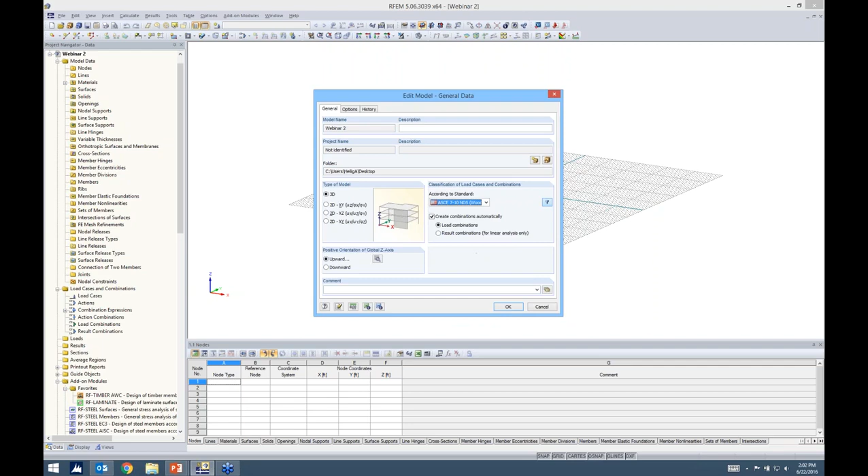When you launch RFEM, this is the dialog box you'll receive. You simply need to give your model a name and define the type of model, 3D, with the orientation of the z-axis upward. For our load combinations, we have ASCE 7 for 2010, the NDS wood load combinations. I check the checkbox to create these automatically, then simply click OK.

Some of you are familiar with RFEM, but for those who aren't, this is essentially the program. We have the tables for data input as well as our results down here at the bottom. We have our project navigator on the left, which can also be used for data input. We have our display tab down here, which basically controls everything in our view window.

We have views, which we'll be using today, and then once we run our results, we should get another tab down here that says results. And then, of course, we have all of our toolbars at the top for our modeling purposes as well.

So we want to begin today with our walls, and typically with walls we would want to model them in this vertical direction. What I find easiest is to use line elements to begin with, and up here we just choose new line in the toolbar, and you'll hear me say this quite often. We have a lot of AutoCAD-like features, which I think is one of the more powerful capabilities in RFEM.

Not a lot of time will be spent trying to create very complex geometries because we have all these capabilities within the program itself, such as splines, polylines, arcs. So for line options, we have the typical straight line, but we can of course choose any one of these. For our application, we'll just go ahead with a single straight line.

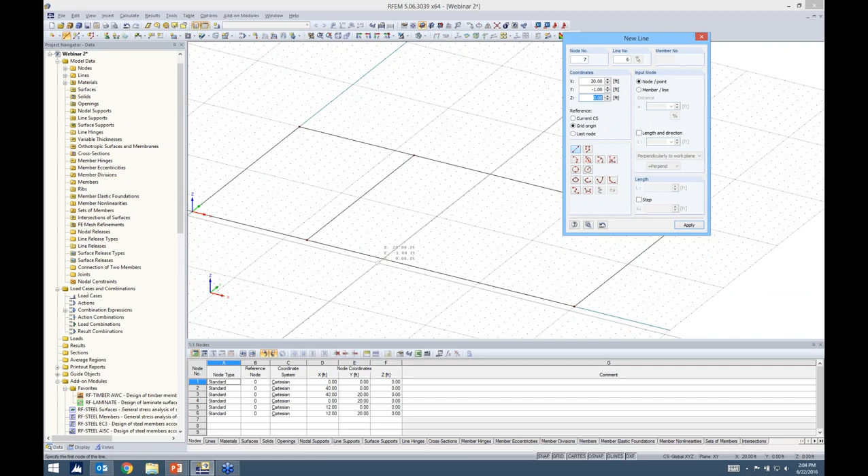Now all I'm doing is using my drawing grid to draw a 40 by 20 outline of my building here, and you'll notice that I just snapped to the different points. I'm going to add an intermediate wall, maybe right here at 12 and one more at 20.

So we have nothing more than just these 1D line elements here, and what I can do is select them, right click, and under line I can go ahead and extrude the line into the surface. Something to note here: these are going to be cross-laminated timber panels.

Cross-laminated timber is not available in RFEM. In order to define all of those different layers and properties, we have to use our RF-LAMINATE module, which we'll be spending some time in a little bit later today.

So it's worth noting that the material here for our panels doesn't matter. We can just go ahead and choose something very general such as concrete or steel, because all of this is going to be overwritten later by the add-on module RF-LAMINATE. So for now, concrete is fine.

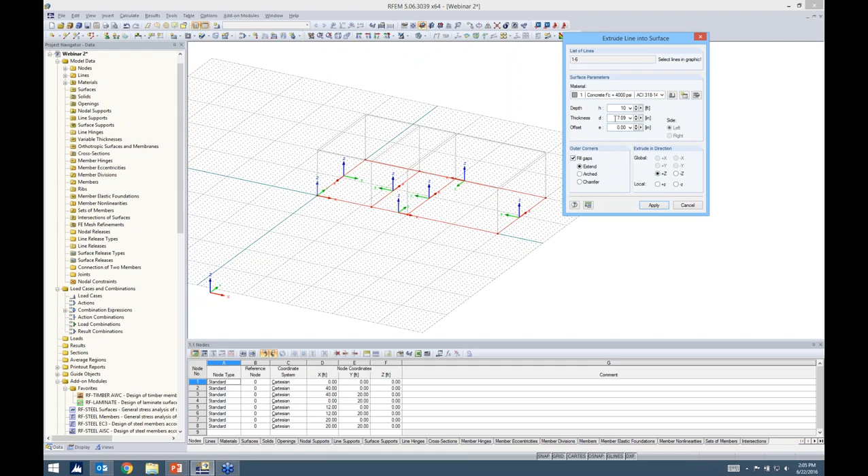I want a height of 10 feet. The thickness doesn't matter either; that will be overwritten as well. So I hit apply, and now we can see that our walls are quickly generated.

Maybe we want to add some openings in these walls, and for this I'm going to change my work plane. You'll notice that work plane is just on this front wall of this structure. Work planes are important because when we continue modeling, the work plane confines exactly where you're drawing your elements, so I don't have to worry about drawing out in space or accidentally drawing on the back wall. I'll be drawing where this work plane is set.

As far as openings, our other toolbar up here has all the different opening options. We have the typical rectangular opening, but also many other options. This can be super powerful when doing finite element modeling, or if you have a structure with odd geometry for openings in a slab or wall. You can see ellipses, polygons, anything you can think of.

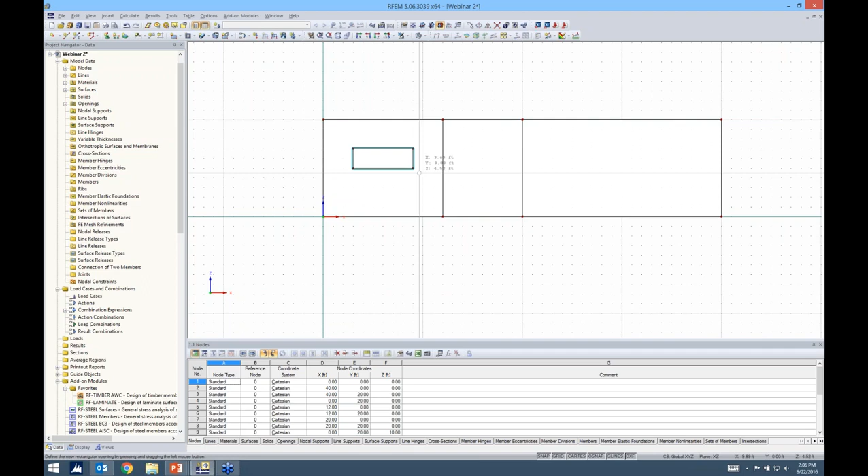For us, we'll stick with a rectangular opening, and I'm just going to draw some windows here, nothing too complex. Maybe we want a door opening here, and lastly a window over here.

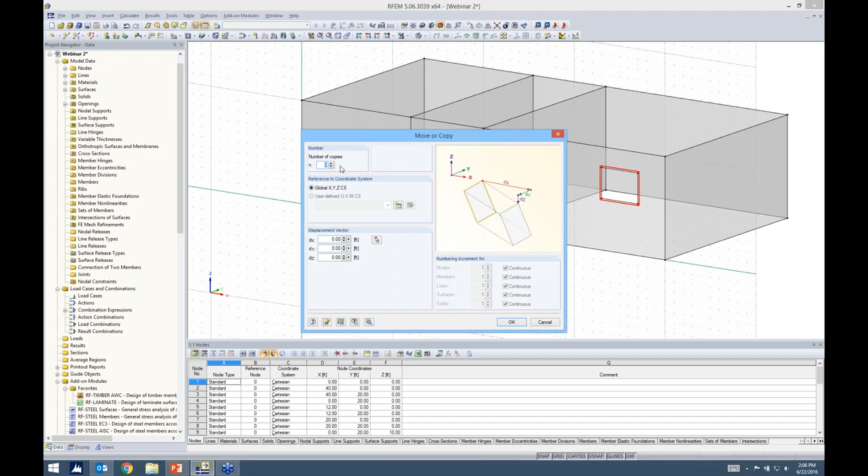Now, as far as the windows for the back wall, I can hold down my control key to select these openings. I'll use my move tool and create one copy, moving it back 20 feet in the Y direction. You'll notice I'm going through modeling maybe a little quick.

We have plenty of other webinars that have more basic modeling. I really want to get to the CLT and timber design, so that's why it may seem a bit quick in terms of all the modeling behavior.

Okay, now that we have this defined, I'll go ahead and change my line grid now for my floors. I simply change the work plane again, and you'll see how quickly I can define my different origins, and now I'm at the top of the structure.

We have this other button up here, and what this does is let me select all of the model. Instead of a single continuous line that previously existed up here, these are now broken up where the wall panels intersect. The reason for that is now I can create a surface by selecting my boundary lines. Again, the material and thickness don't matter—this is CLT that we'll override at a later point.

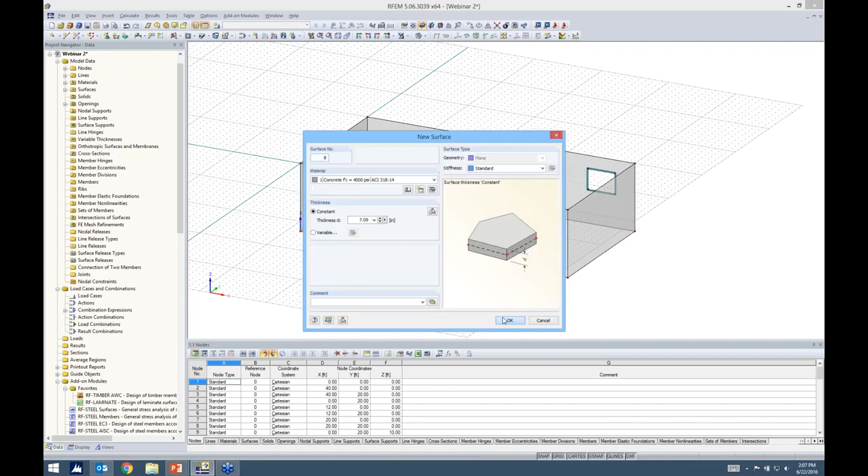So now all I need to do for my floor elements is select my boundary lines and do the same for the second diaphragm. And we have our first floor.

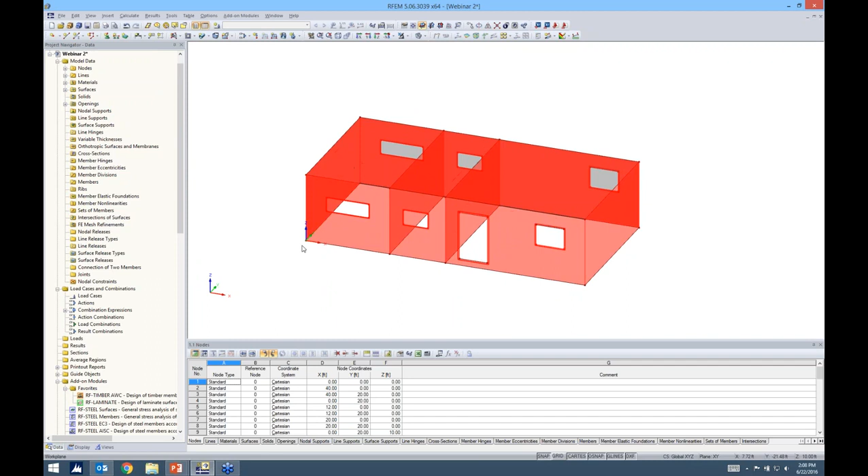Now we want to create our second floor. That's just as simple as selecting our walls—I was careful not to select the floor panels—holding down my control key, and dragging and dropping. This is a very useful feature in the program to save time on modeling.

Maybe I don't want this opening up here at the top. I can just select it and delete it.

Now we want to create a pitch in the roof. For this, I'll turn my rendering off to only a wireframe model. This way I can select all of these lines at the roof level, right click, and divide the line by N intermediate nodes, placing one intermediate node at all of these lines.

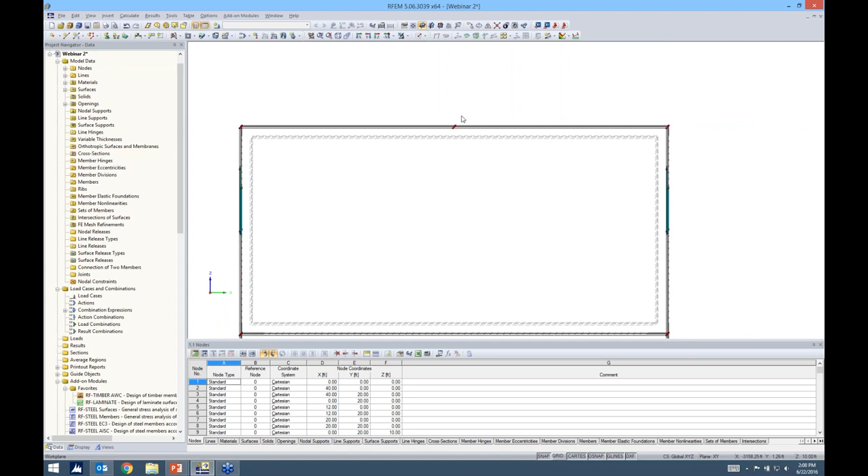Pretty simple. Now I want to highlight only these nodes and use our move and copy tool. This time, instead of creating a copy, I'm going to move these particular nodes in the positive Z direction 3 feet. So now you'll see we have a pitch in the roof.

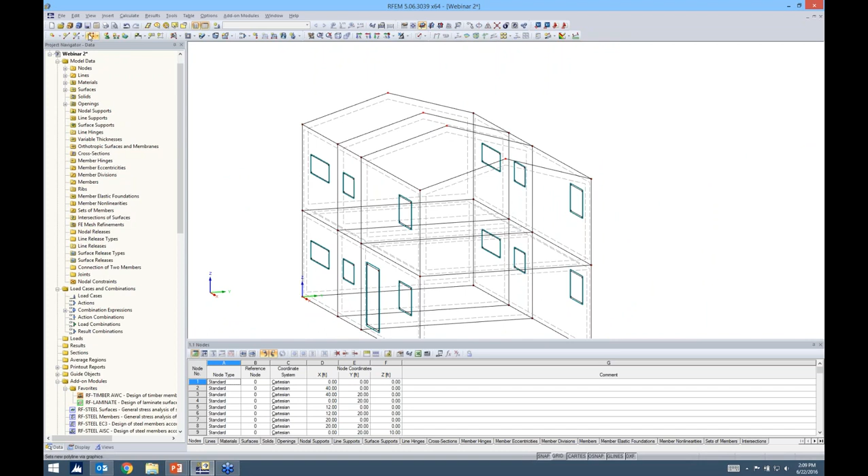Fairly straightforward. So now we want to draw our timber members. We click on New Single Member, and you'll see the member type is considered a beam. There are several other options here, but for this application we just want a typical beam member. We want to create a new cross-section, and up pops our cross-section library, where I'll choose standardized timber.

Then this dialog box will pop up for all of the different standardized timber sections. We can further filter according to AWC. We also have CSA in here, depending on which type you're exactly looking for.

You can also go ahead and choose a favorites group, and I created this favorites group USA, where I just added a couple shapes that I'm using for today's webinar. Rather than sifting through all of those different shapes, you can create as many favorite groups as you like and add or delete any of these shapes here.

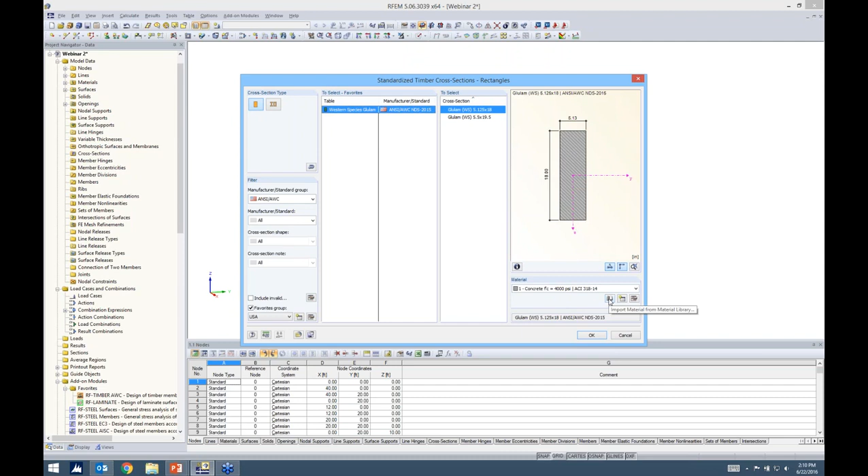Concrete won't suffice for this timber member, so we need to go ahead and define our timber material. For this, I go into my material catalog. Of course, we want the timber filter initially, and then you'll notice that we have all of these further filters.

For our application today, we want to be in North America, because North America contains the AWC materials and the CSA materials. Even for AWC, it's quite an extensive list. You do have the option to search here, but again, I added it to my favorites group.

So for this particular member, I'll use a 24F-1.7E for my material. All of the material properties are shown right here, so very easy to access. Now it looks like we have something more like a timber material. I can click on this info about cross-section, and I can get all my cross-sectional properties just at the click of a button.

Now, one thing to note here, if I go ahead and click on my edit material again, and I look at my particular material model, this list isn't really as extensive because I only have a 1D element chosen right here, but I'm going to jump back to the PowerPoint.

All material models are listed here available in RFEM, and technically timber is considered viscoelastic, meaning that the strain rate is dependent on time. But realistically, we can't model viscoelastic in software. It's just very complex, so we will just go ahead and consider it elastic. This is basic behavior of modeling of timber.

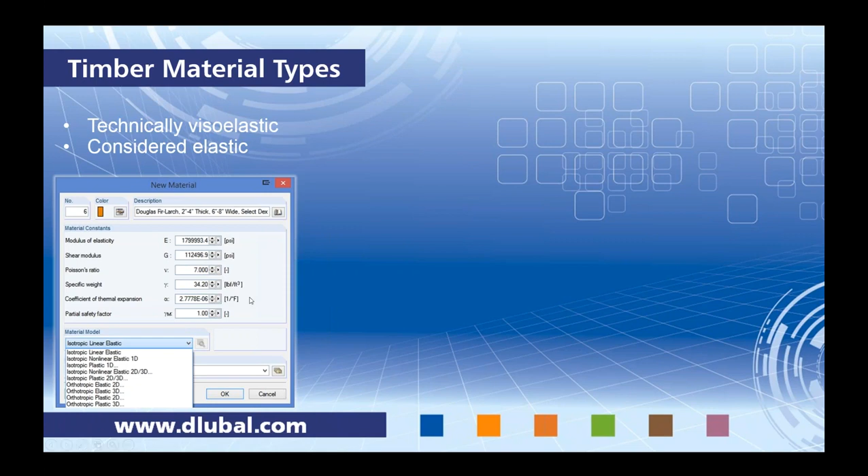However, I want to differentiate the different material models for our different elements. So for 1D member types, such as we're modeling right now, we'll use isotropic linear elastic. For 2D surface elements, we're using orthotropic elastic 2D. Most of us know what orthotropic is - it's just where our material properties are different in the X versus the Y direction for each surface element. And lastly, we have the solid model, and for that same concept, except now we have 3 directions for a solid.

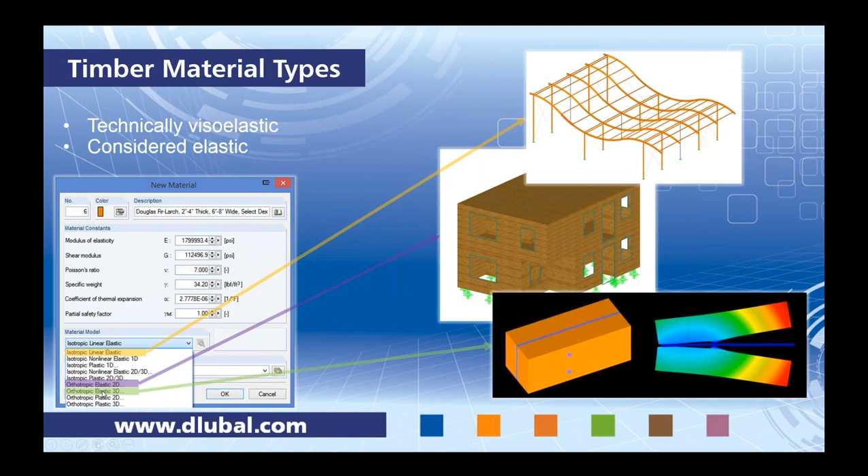Okay, back in RFEM, if I go ahead and click OK, and you've used RFEM before to model timber, you'll notice this error message that pops up every time. This error message is saying you must have incorrectly defined your material - Poisson's ratio is greater than 0.5. The calculation is possible, but only E and G are applied. Is this okay? I really want to explain what's going on here, because some of us may just click yes and not really know the logic behind why this program's throwing up the error.

So timber is actually anisotropic - the properties are changing with the direction along the object. This is pretty apparent for timber. However, in the program for 1D members, we only have the option for isotropic, and isotropic materials use this equation to calculate the Poisson's ratio: it's modulus of elasticity over 2 times the shear modulus, minus 1. So all the program knows is to take E and G, relate it to this equation, and go ahead and calculate Poisson's ratio. Well, 7.0 is extremely high, so that's why the program's flagging it.

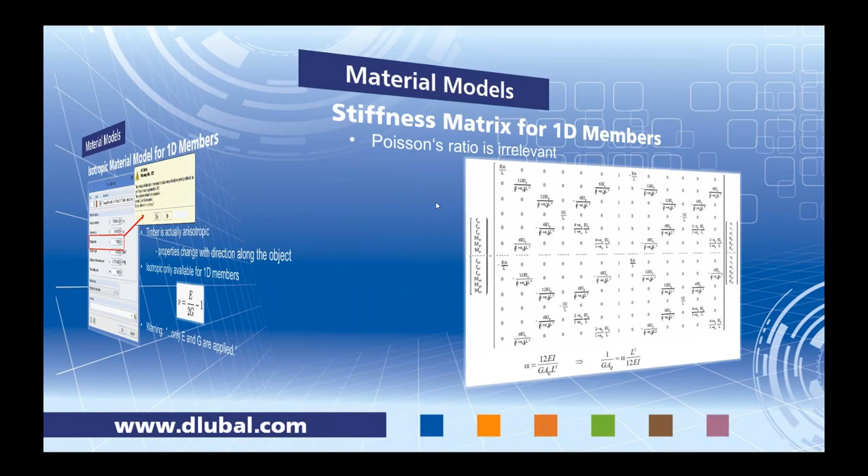And it tells us only E and G will be applied. Is this okay? And the answer is yes, this is fine. The reason why is because if we look at the stiffness matrix for a 1D member, Poisson's ratio is irrelevant - you won't see Poisson's ratio referred to anywhere within this stiffness matrix. So the fact that only E and G are applied, which obviously is present throughout this matrix, that's fine. Not using Poisson's ratio is not a big deal.

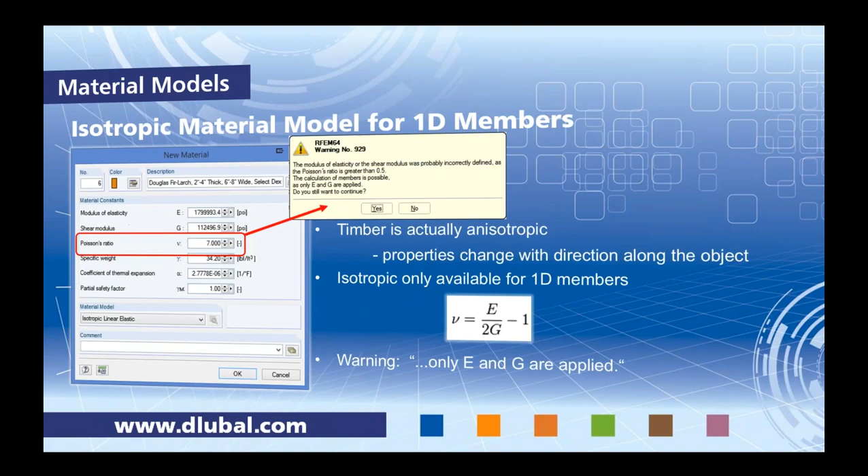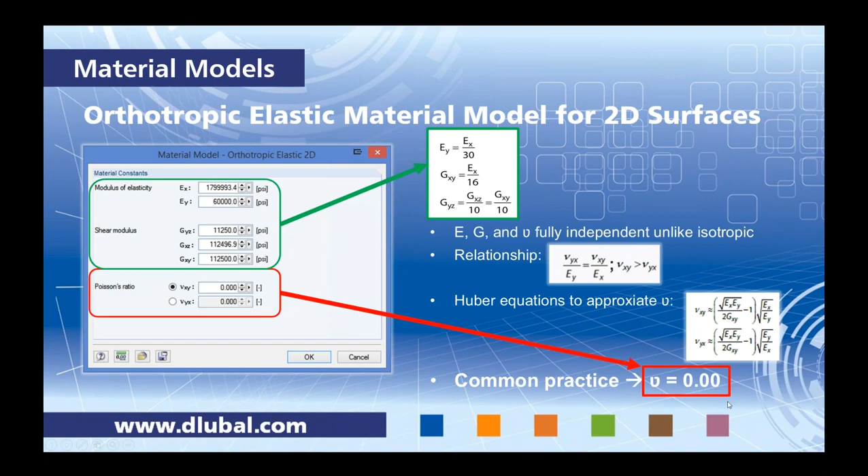We do have a relationship with Poisson's ratio and the modulus of elasticity, and there are equations to approximate Poisson's ratio. But timber cut down on the East Coast and the exact same species on the West Coast will have a different Poisson's ratio, so there's really no way to get that exact number. So it's common practice to just use Poisson's ratio equal to 0. The program is set up to default to 0, so that's why we use 0.

Jumping back into RFEM, here's this error. We can go ahead and click yes - that's where that's coming from - and then I can click OK again.

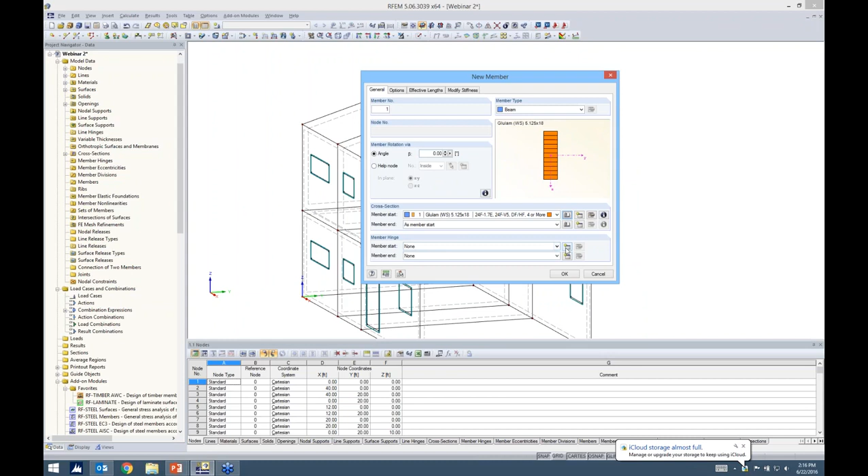Something to also note, we want to go ahead and apply some member hinges to this end. I want to create a new member hinge, and the default is to create a pinned release to release rotation in the local Y and Z axes. There's a nice picture here if you don't understand exactly how the local axes are laid out. You also have the ability to really get into nonlinearities if you choose, such as partial activity - you can define your own diagram, plastic hinges - but you'll notice everything is pretty well hidden if you just want to keep it as a typical pinned or fixed release. So these nonlinearities are possible, but it's not overwhelming since you don't have to sift through all this information just to get your typical release here.

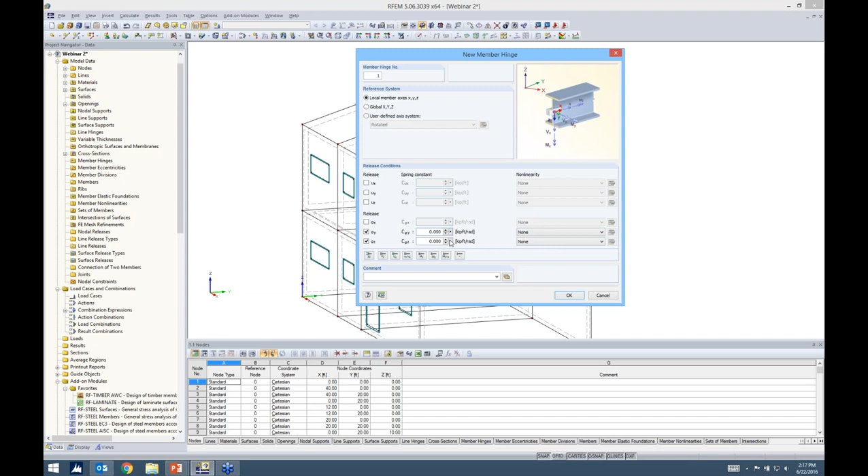So for the member start and member end, I'll use a pinned release. Here I'm just going to go ahead and model this member between each of the walls, and the reason why I'm doing it between each of the walls is I want the pinned connection at each wall. I can go ahead and choose the rendered view again, and we can see how that timber member is applied to the roof.

Now the next thing we want to do is go ahead and draw in our rafters. We'll create a new member again with a new cross section, this time a parametric timber, and all I need to do is type in 4x8. Now I don't want this same material - I'll go ahead in my material library. Under my favorites group, I already have Douglas fir larch put in there. I click OK, I click OK again.

Now to address the member hinges. I think where the first rafter joins this larger ridge member, I want a typical pinned release - that's fine. However, for the member end, where we're framing into this CLT wall, I'm going to define a scissor release. And what exactly is a scissor release? Well, a scissor release is where we have 4 members framing in together here at this single node. However, the continuous members, such as 1 and 2, will go ahead and transfer moment between each other, same with 3 and 4, but we don't want to transfer moment to the perpendicular member. We only want to transfer axial and shear forces.

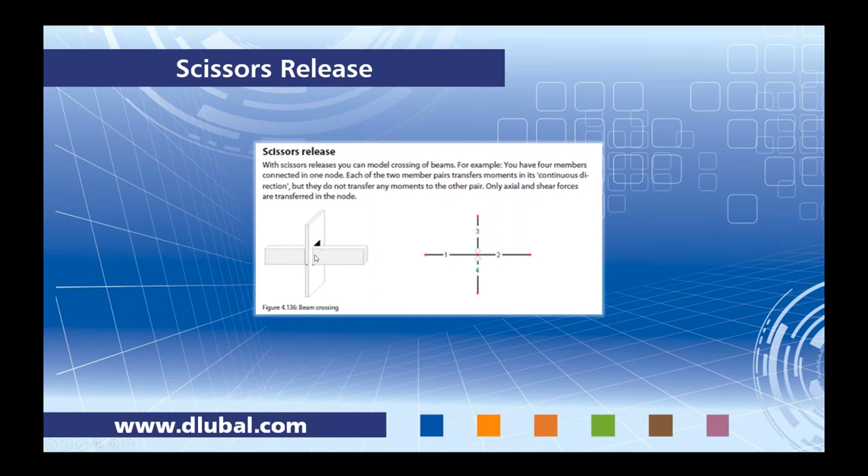I think that this is best illustrated - and by the way, this was just taken from our manual - with a beam or our rafter passing through the wall. You can see that moments will certainly be transferred for the items considered individually, but considered together, we don't want to transfer a moment to each other.

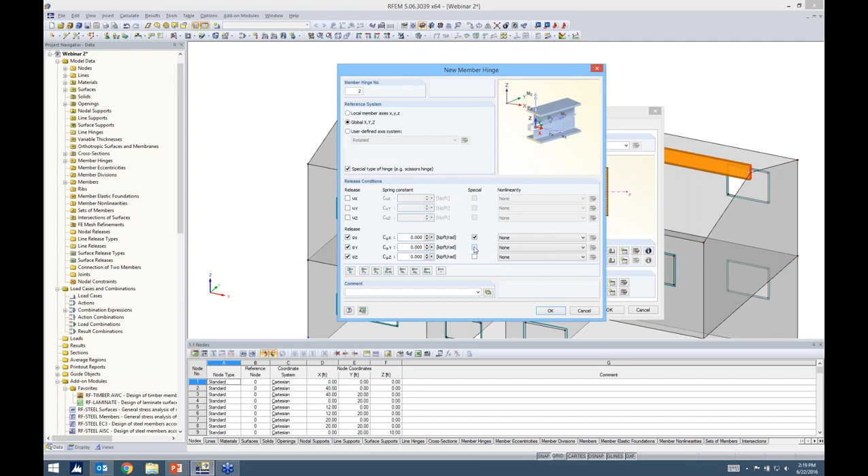So we will go ahead and go back into the program, and under the member hinge, we'll create a new member hinge. Here, instead of the local X, Y, and Z axes, I'm going to create a global X, Y, and Z. Then you'll notice that this option pops up here for a special type of hinge, and with this I can now go ahead and check this checkbox for special and release all rotations.

If I click OK, you'll notice that the program denotes this as a little bit different from a typical release by putting an S on it for special. So I click OK, and then I just need to go ahead and draw in my first rafter.

The other thing I'm going to do is use drag and drop by holding down my control key to extend the member. I want to adjust my member releases here for the second one. I also want a scissor release at this location, so my member start, because I've already defined it, is available in this drop-down. Member end doesn't matter, because I'm going to divide this member by a certain distance.

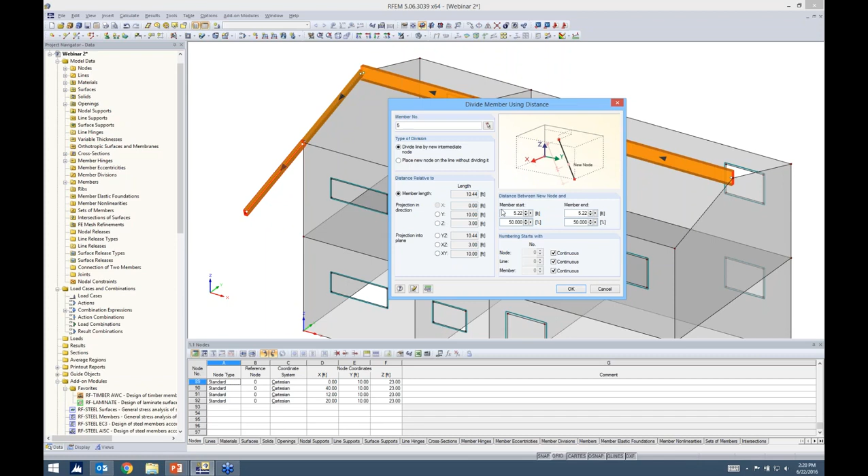When I'm in this divide dialog box, it's nice because I don't have to guess what's the member start and the member end. The program throws up this little black arrow for all members showing you the start and the end, or the I and the J ends. So the member start, I'm going to go ahead and divide it 2 feet from the member start. I click OK, and now I have 2 separate members.

I'm just going to go ahead and delete these. As far as the scissor hinge, I do need to move it over slightly because I'm at this intersection of 2 walls, and the program will give me an error just because it's a very odd connection to be at this particular intersection. So I'm just going to select both of them by holding down my control key.

I'm going to use my move tool again, and in the X direction, 0.5 feet. Oh, sorry, let me undo that. I also had the Z direction defined as 3, so we'll change that back to 0.

As far as the rest of the members, it's easy enough using our Move and Copy tool. I'm going to create 13 copies at 3 feet on center. I click OK. All the hinges, special types of hinges are there. My spacing is correct, so everything looks good.

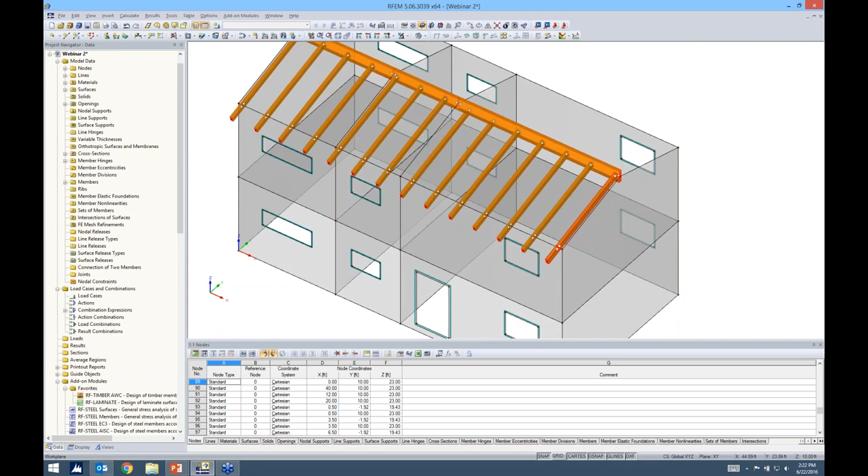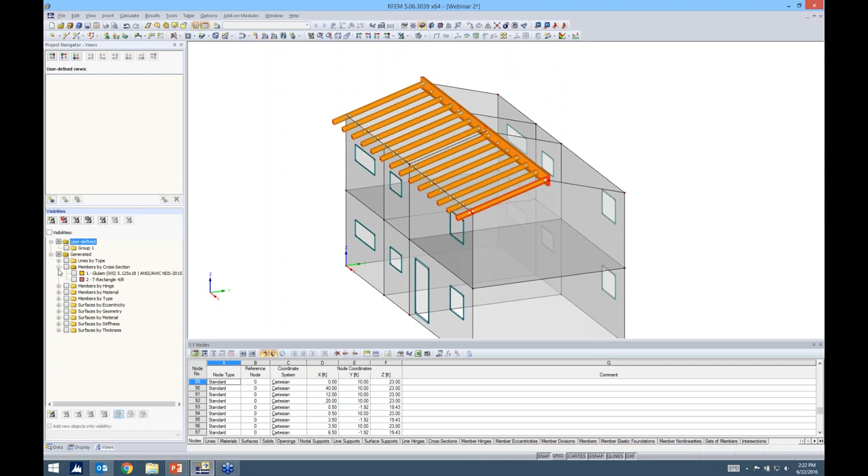Now I need to do the exact same thing for the other side. I could go through that whole process again, or I really want to utilize the tools in RFEM. So under this Views tab down here, you'll see all of these default options, which is basically just to select different objects in the view window here. For example, there's an option here, members by cross-section, so all my different members by the different cross-sections would be listed here.

For me, I just want to select my 4x8s. You'll notice that I can't really select anything else in the model, which is exactly what I wanted. Now I can highlight all of these, and we have the mirror tool, just like in AutoCAD. I'm going to create a copy, and it's asking me which plane I want to mirror through. I want to mirror through the XZ plane, and then I just simply need to choose a point at which it will be doing the mirroring. So I choose any one of these top points. I click OK, and now I have my roof.

So again, a lot of features to quickly model in here. Okay, lastly for this, we want to go ahead and do one more thing. Let me turn this into wire view.

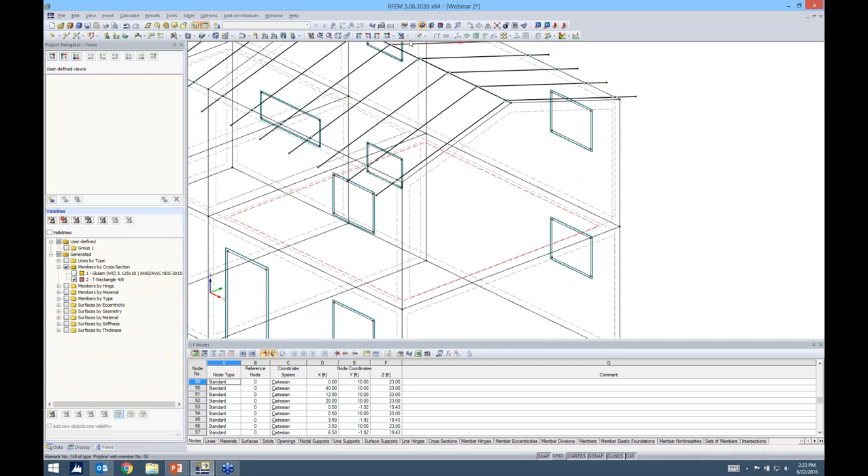If I zoom in and I just select this floor panel here and I choose visibility by selected objects, I'm really only looking at this single floor panel. Well, this floor panel is pretty long, and maybe I want to add in some type of beam along here. That's fairly easy to do, but I really want to drop it down so the eccentricity is included for the surface thickness as well as half the beam depth.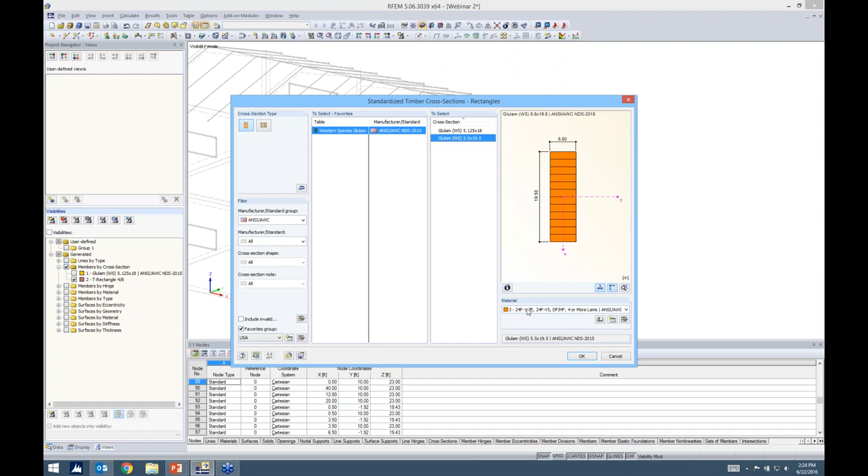With that, I can go ahead and create a new member, just like what we've seen before, create a new cross-section. I'll go into standardized timber here, and I'm going to choose my other glulam that was in my favorites list. Materials already defined, so that's perfectly okay to leave it the same as the other one. As far as my member end releases, I just want a typical pinned release.

Now, there's another option here called options. Under this options tab, we have member eccentricity. If I go ahead and create a new member eccentricity, you'll see that I can either choose an eccentricity by defining the length, either at the I or the J end, or I can do a relative offset.

This is really user-friendly. I want to note, though, that when you're first in this, trying to apply these different eccentricities, it could take a few tries before you get exactly what you want, because the local axis is very important. And just because I've been in RFEM enough, I know my local axes are opposite of what is shown here.

So realistically, instead of choosing the top of the beam, I would choose the bottom, because I know my local axes here will be modeled with the local z-axis up. Now it's asking what you want to offset it by - I can choose either a member or a surface. So if I choose this surface and graphically select it, again, since I know my local axes are opposite here, I actually want to select the top. I went ahead and clicked OK.

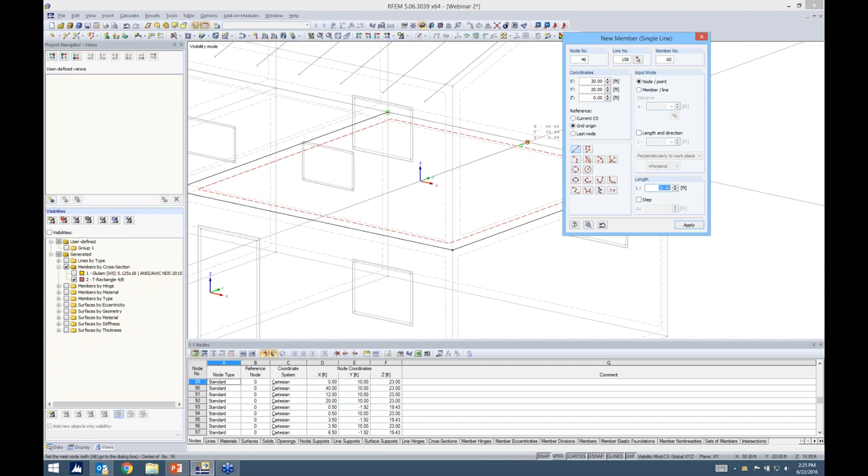Then I can click OK again, and now I can go ahead and model this particular beam. You'll notice too that I don't need to model in extra nodes because of the CAD-like capabilities - my centerline snap point pops up, and I can choose the other centerline. You'll also see a perpendicular line, so it's nice in the sense that I don't really need to worry about drawing in an extra node there.

I can go ahead and render it to show exactly how this beam was dropped down. You can see the rigid links that were created, and these rigid links were created based on half the depth of the beam as well as the surface thickness.

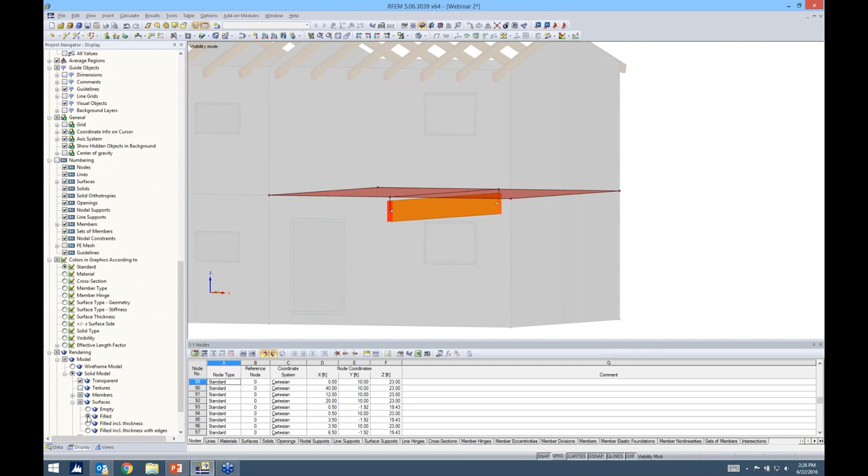So I can also go into my display down here in my project navigator, and like I said, this controls everything we're seeing here. I just want to show you guys that you can go ahead and render these surfaces to filled so that you can really see how this beam is dropped below that particular panel. Okay, I will go ahead and cancel my visibility mode here.

And the last thing that we want to do is go ahead and add some line supports here. Line supports can be applied, let's say, to the bottom of these walls. Default, hinged, and rigid - pretty self-explanatory.

If I create a new support, again just like member end releases, you really have the ability to dive into these nonlinearities - friction, partial activity, sliding, all of these are possible with these support reactions. We're not going to get into this today. We'll keep it as a linear support, but just know that it is an option.

So for us, we'll just keep it as a typical hinged support, and we'll apply it to all the bottom of the structure. Okay, so our modeling is essentially complete for the structure.

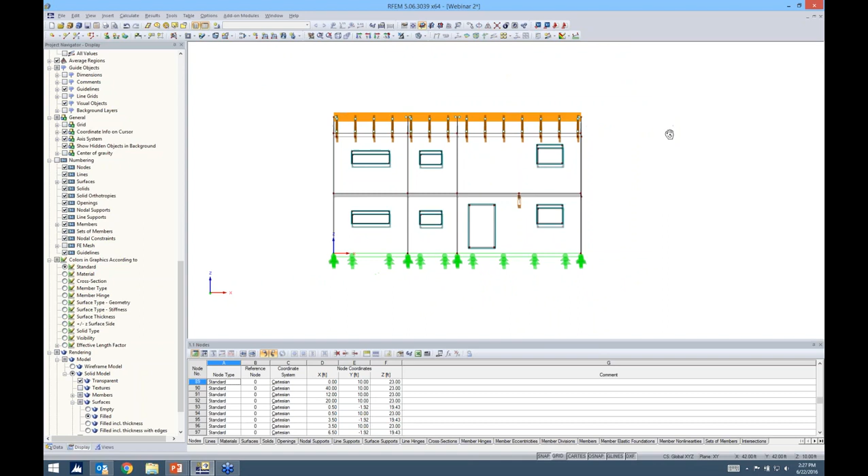Now I want to go ahead and quickly add in some loads. For this, I'm going to create some new load cases, which opens up our load cases and combinations dialog box. The first load case will be dead, and we want to keep the action category as dead - you'll notice self-weight is activated for it.

I'll create another one and call this one live, assigned to live load. We need to pay careful attention to the action category, because this is how the program assigns these load cases to the ASCE load combinations. If you incorrectly define an action category, you're going to get the wrong load factor. Keep in mind that these are important when assigning your load cases.

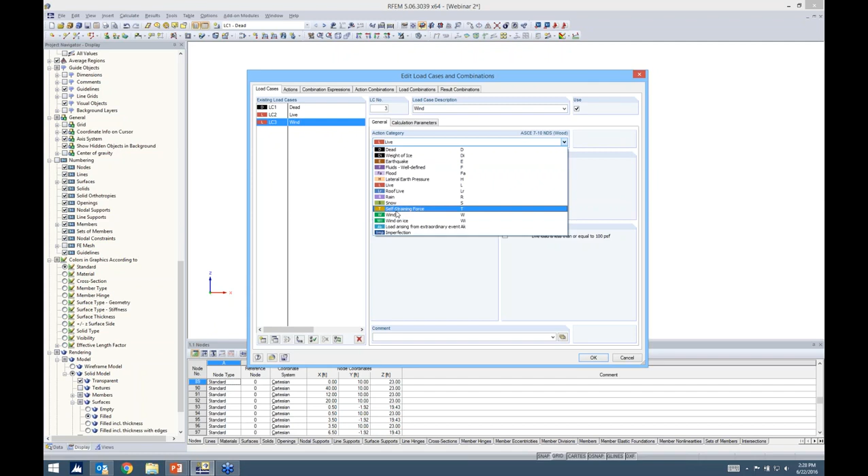We'll go ahead and assign wind here to wind, and lastly we will assign snow to snow. Okay, I can click OK out of here, and you'll notice that when I'm looking at my drop-down box, which was previously empty, I now have all of my load cases. The program automatically created all of my load combinations according to ASCE 7-10.

For now, when you're applying loads, you want to make sure this is set on the correct load case that you want the loads applied to. So I think what's easiest here is to go ahead and highlight our floors and make this visibility based on the selected objects.

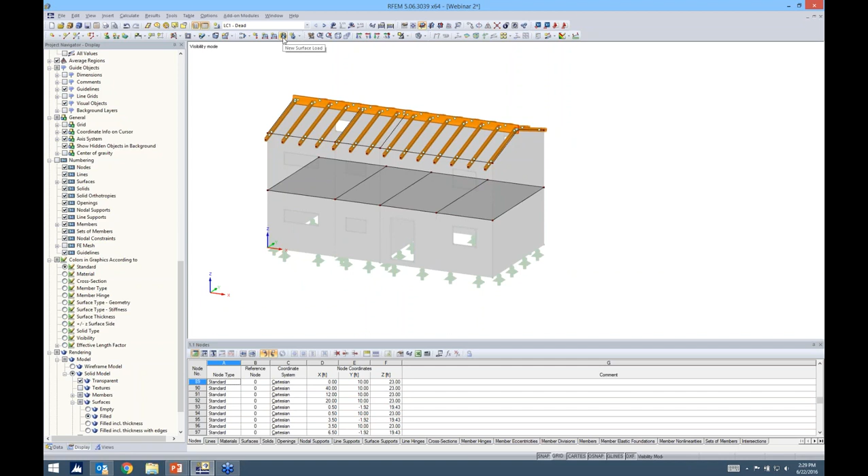Then I can go ahead and quickly add surface loads to my first floor. I just go to New Surface Load, and you'll notice you have options to really get into depth for your surface loads.

For us, we're just going to keep it as a typical force uniform. As I scroll through these different load directions, this little picture updates here, which is nice, so you can see exactly how you're applying it in your model.

For us, we will go ahead and stick with the ZL direction, in the negative direction, with our magnitude at -0.1. I click OK, and it's as easy as clicking on the surfaces.

Now, for my members up at the top, I want to use our tools, generate loads from area loads on members via plane. Again, we can scroll through these different options.

I'm going to stick with the typical ZL. What this is going to do is apply an area load, and it will actually distribute the line loads based on tributary area to all the different members.

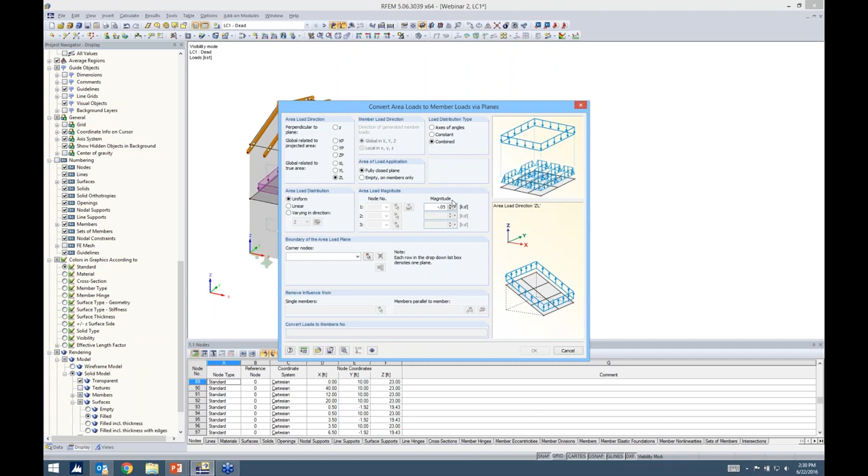Now my magnitude will be -0.05. The program's asking me, okay, where should I apply it? I need to give it some area loads.

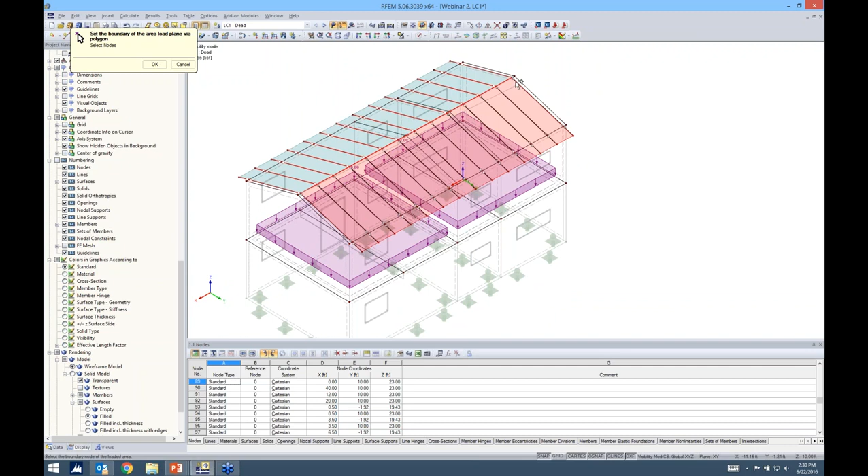I can change this back to my wireframe, and I'm going to select first one side of the structure, and then go ahead and select the other side as well. This will be taken into consideration when the program applies this dead load to the roof members.

I can actually also, which I think is a nice feature, remove the influence from single members, or remove the influence from all members parallel to a certain member. So if I choose this option, maybe I don't want the dead load applied to my ridge member. I click OK. I click OK.

Up pops some math, just showing you exactly how that was applied. I can also right-click and display it separately.

So without solving, I can already see what these loads are on the member, which is nice. For a little bit of a cleaner look, we can keep it as a single load.

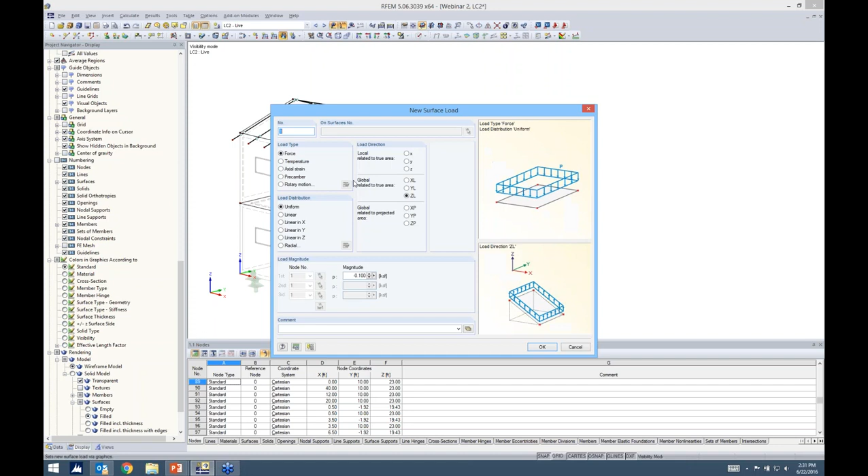Now, quickly going through live load, same thing. We'll just apply a surface load in the ZL direction, but our magnitude will be a little bit less, and we can go ahead and apply it to these two surfaces here.

Now, wind is obviously a little bit different. We could technically do some calculations according to ASCE. Just to let you guys know, we do have the ASCE load combination generator for wind loads in our internal version now, so I'm hoping that will be released fairly soon.

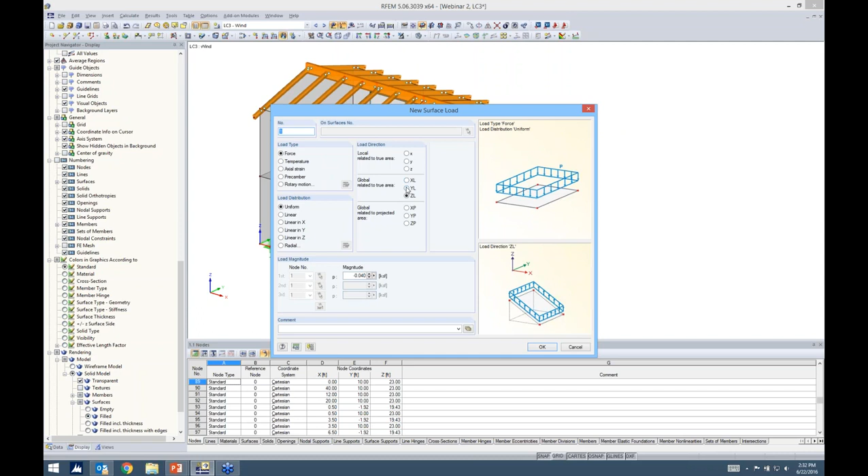For today's sake of time, I'm just going to apply a lateral surface load in the Y direction with a magnitude of 0.04. All I need to do is click on my surfaces. You'll notice my openings were taken into account.

Maybe later I decide, okay, I don't want this opening. If I delete it, the load is automatically filled in that particular opening. So everything is very automated in the program, which is nice for a lot of the changes.

Now, lastly, we have snow load, and for this I do want to utilize our load generator for snow loads for a duopitch roof for ASCE.

For this application, I think this is nice because if you're used to snow loads according to ASCE, all of these factors will look very familiar. If by chance you're not sure on a factor, you can click this info button and see all the tables taken directly from the code.

So it's nice that you don't necessarily have to flip to the code to get some of these factors. The same with the ground snow load - we actually incorporated this map, and we can double click on, let's say, our structures in South Dakota, and it will automatically come up with our ground snow load.

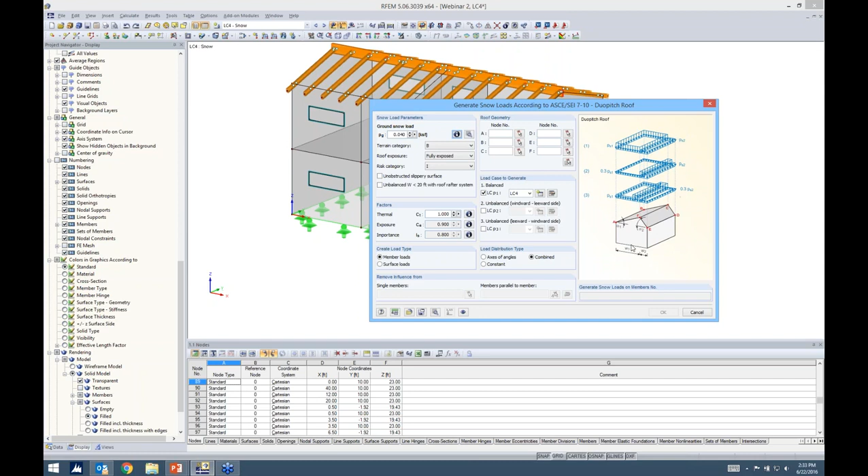The roof geometry needs to be defined, and one important thing to note here: you can't just click all over to create your roof geometry. You really do need to follow these same guidelines as what this little window is showing you. So with that, I can easily just go ahead and choose my roof geometry based on my rafters here.

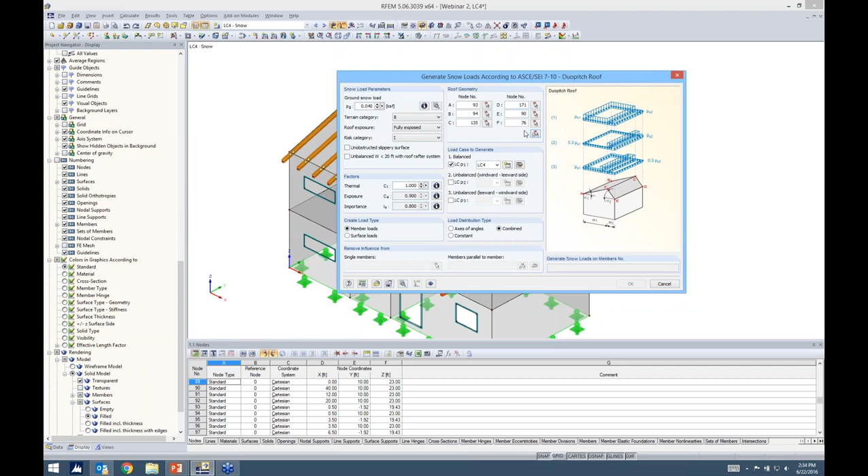And the program jumps back into this. Now, I'm just going to do a balanced load case, and you'll notice it automatically assigned it to our snow load. If I go ahead and click... sorry, for some reason I must have not selected my roof area load correctly. Let's try that over again.

No, okay. Well, regardless, we can go ahead and apply the snow load here. If I go ahead and generate my loads again, I think there might have been an issue with the snow load generator in terms of my roof geometry. So for this, I can go ahead and select my options again, but this time I'm going to turn it into wireframe to see if that works a little bit better. Maybe I was not selecting a proper node.

Okay, much better. Now that's a good point to make: if you don't correctly define this roof geometry, this OK will be grayed out. The program's smart enough to know that something's slightly wrong, so you do need to address something in your data here. For me, I must have clicked on a wrong node someplace. We can exclude the members parallel to member 4 again, and I click OK.

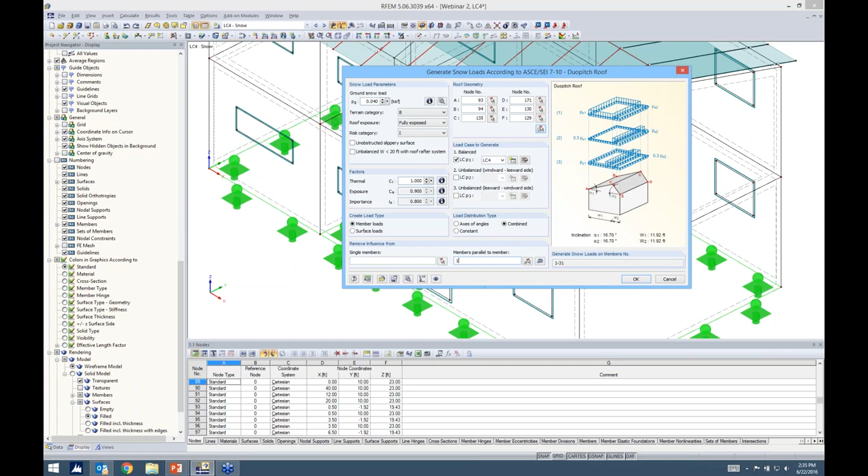Up pops my calculations for the ASCE, and then you can see here that, again, we can right-click and display separately, and we get a nice layout of how the load is being applied to all those different members.

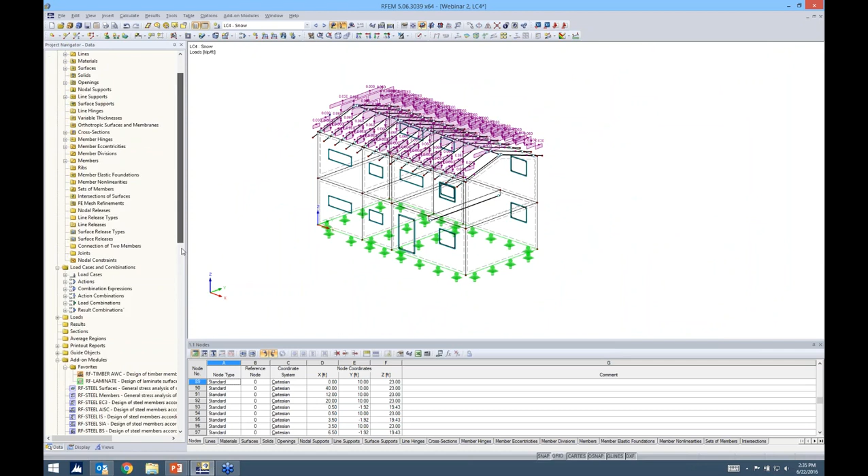Okay, so now that we have all that, we can actually jump into the laminate module. So RF-LAMINATE here. I want to go back to the PowerPoint to describe what we're doing in RF-LAMINATE.

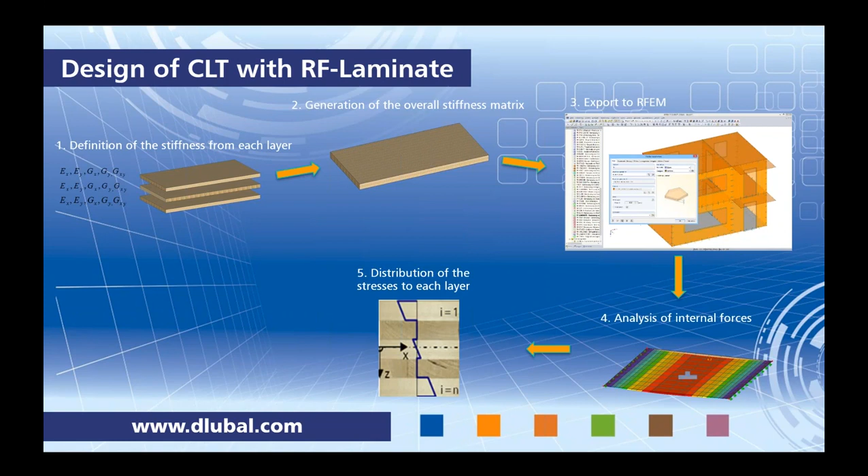So we now no longer have those concrete panels and floor panels and such, but rather now we have the laminate panels with the correct stiffnesses. The program will go ahead and run all of our load combinations based on ASD or LRFD and get all of the internal forces. Then it takes those internal forces back into RF-LAMINATE. It will distribute all of the stresses to each layer based on these differential equations here. And maybe more graphically, you can see the stress distribution throughout the depth of a cross-laminated timber panel would look something similar to this.

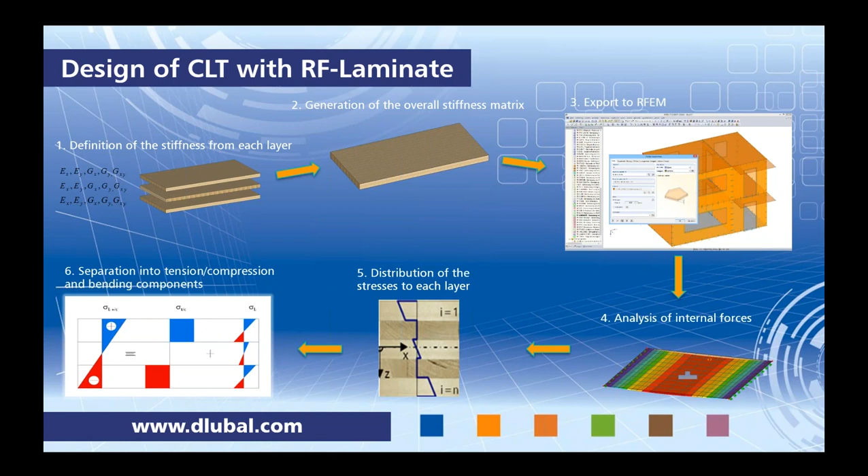Then for each stress, we're actually going to go ahead and separate it into tension, compression, and bending components. Then we take those stresses and compare them to what the code's giving us for our limit stresses, and then we're going to get a code check. So essentially, that's how RF-LAMINATE is working within the program.

So you can see here that I'll go ahead and go back to my rendered view, and I have a multitude of add-on modules, but I added the ones I'm in most often. You can just right-click and check favorite to move it up to the top, which is nice. So I'm launching RF-LAMINATE. When I say add-on module, this is the add-on module. It looks like another dialog box.

So I don't have to remodel anything. I don't need to worry about linking data together. Everything is all within RFEM. And the other thing for these add-on modules, you just want to work from top to bottom with the input data, which is given here on the left. So just work down this list.

So the first thing it's asking us is what surfaces do we want to design. I can check this checkbox all, so all surfaces are now selected in there. Now for standard, we want to choose the NDS-2015. And you'll notice we have both ASD and LRFD. I'll go with ASD, therefore I want to select my ASD load combinations from ASCE. So here I can just select the ASD load combinations, and these are what I'm going to use for my design.

Serviceability is if you want to go ahead and do a serviceability check in the program, and under the standard, you see you can set here your limiting deflections. Today, we're not going to do this, but just to note that that is there.

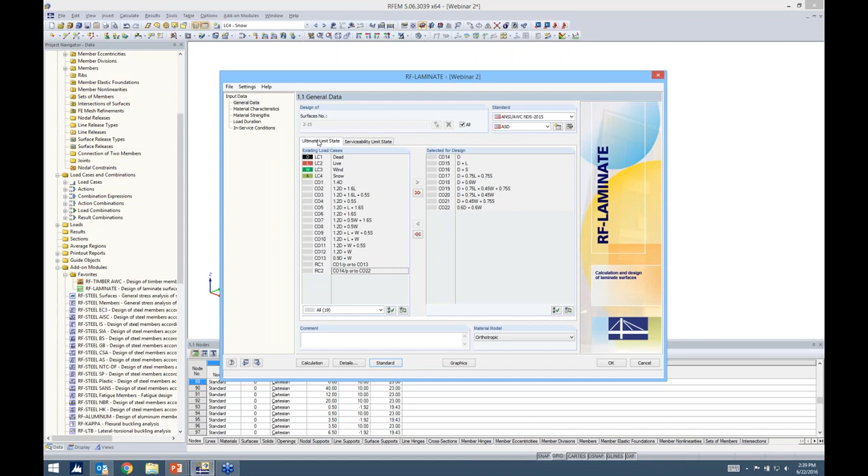Material characteristics. The first thing we want to do is define the first composition. I'm going to title this one walls. You can, of course, go into your material library for timber and add in all the different particular material types, whatever you'd like, and give it a thickness and a direction.

But we also have this option: import layers from library. We're working on placing Structurlam products in here as well, so that should be available very soon. For now, we also have the PRG 320 CLT. We have the different grades here, and we also have a few different thicknesses.

For walls, I'll go ahead and stick with 4 1/8 inch. Now you can see that the thicknesses were automatically generated, as well as the direction of the different layers. You can see the materials listed here, and I have a nice picture of how my materials are actually layered. It's going to ask me which surfaces I want to define, so all I need to do is select my walls. I click OK, and that's automatically done.

Now I'm going to create a new composition called floor. Same exact thing, we'll get this from our material library, but I'm just going to increase the thickness to 6 7/8.

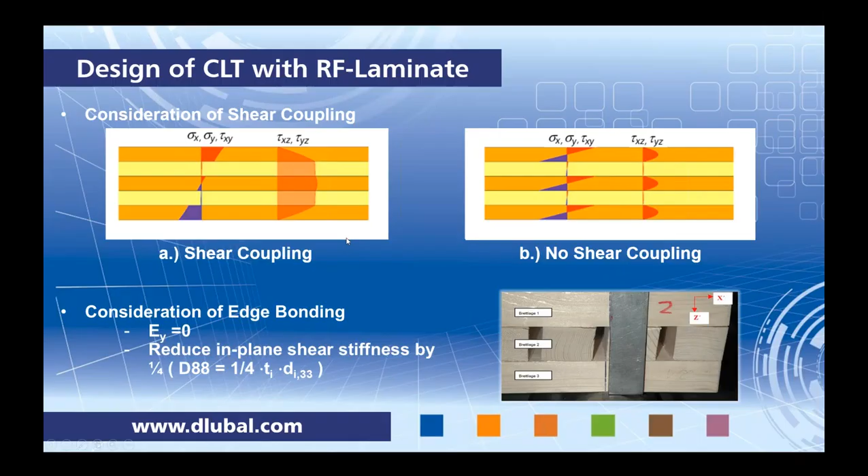Now for shear stiffness elements, this gets a little bit more complex. If we take a look at basically any type of rectangular section, we will always have a shear stiffness reduction. For homogeneous rectangular sections, this is set at 0.8. However, for CLT we obviously don't have a homogeneous section — we have all these different layers, so we can't really make this assumption. For our shear stiffness, we need to determine the shear correction coefficient times G times A. Now, what is this K, though, for cross-laminated timber?

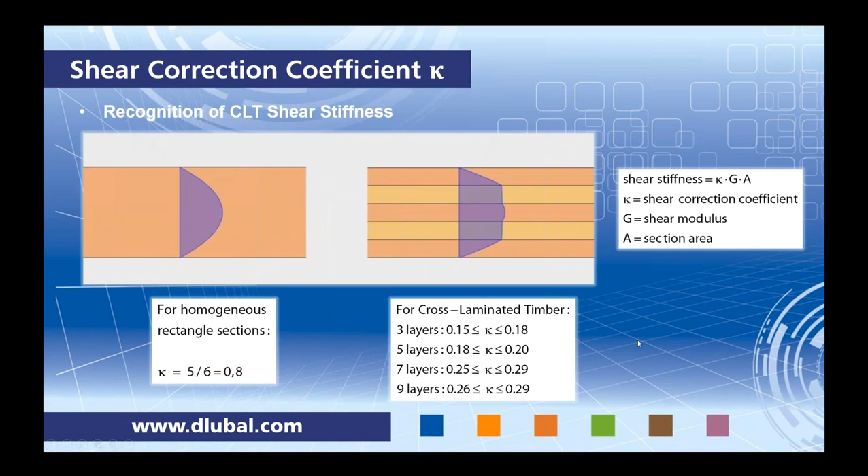There are several suggestions from research to use these ranges for 3, 5, 7, 9 layers. The question is, what if we get to a point where we have 10 layers? Or what if we really want an exact coefficient within this range, but we don't know exactly where we fall? Well, the good news is that the program does this automatically.

Shear stiffness coefficient calculations according to general research and regulations, also found in the CLT handbook for the USA, give this equation for the coefficient, and it's pretty complex, as you can see. When you look at RFEM, these insanely long calculations are what RF-LAMINATE is doing in the program to determine the D44 and D55 entries in our stiffness matrix. It's actually going through all of these calculations to get these values.

Now, if you're an engineer and you have a lot of time on your hands and you're dying to know what this coefficient is in the X and Y directions, you can take the D44 and D55 values given in the program and back calculate to find out what those shear coefficient reductions actually are.

Going back into the program, if I click on this info button, I can open up my stiffness matrix for this particular composition and see D44 and D55 here. These are the values you would want to use. This is something you probably won't be changing unless you really know what you're doing, because the program is automatically calculating this for you. Just keep that in mind in these details options.

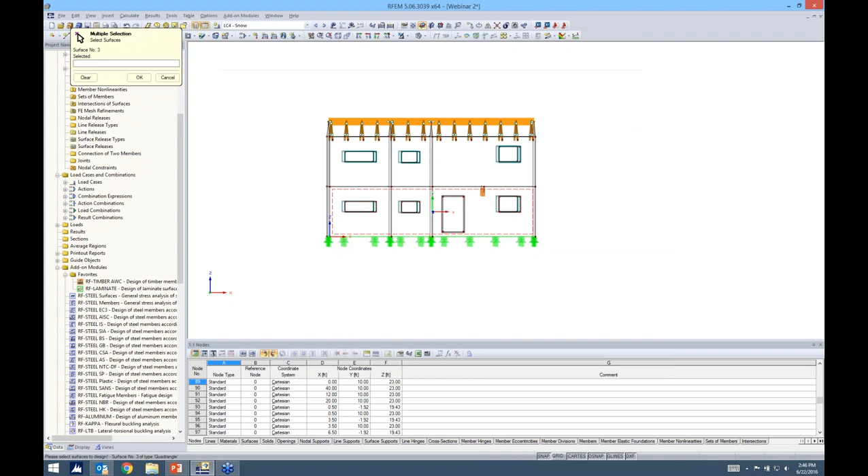So if I click OK here, let me go back to my floor—I forgot to assign my surfaces to my floor. I click OK, and now I look at my model and you'll notice they're blue. I double click on them—they're not concrete anymore, they're now RF laminate.

In order to edit them, you need to go back into the laminate module. I can right click and display my local axes. Notice that all of my local axes are in the horizontal direction. This is not good—we want these strong layers oriented in the vertical direction to take those gravity loads.

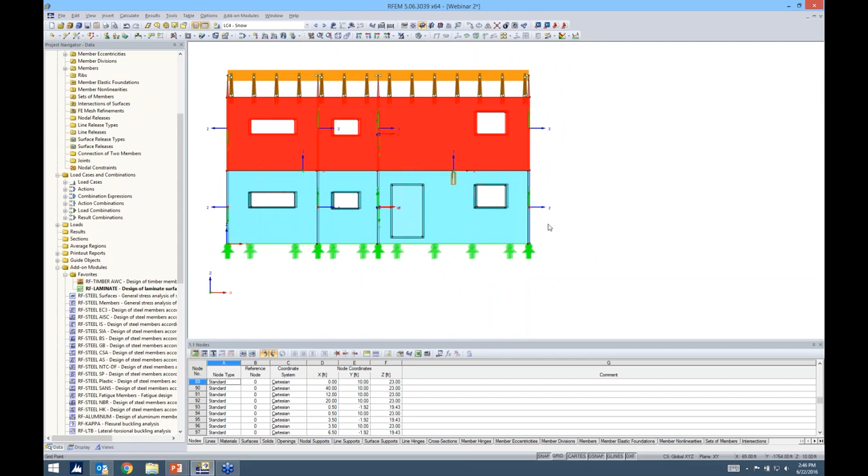I could sit here and change the orientation of each surface, but better yet, there's a quick feature in the program. If I select all of my wall panels, right click, go to Surface Edit, there's an option called Axes. Under Axes there's an option called Axis, where I can set all of my local x-axes parallel to a line that I choose in the model. I'll choose this vertical line here and click OK. Now all of my local axes are oriented in the vertical direction.

These ones come from the floor panels, so we don't need to worry about that. Again, very important detail—otherwise you risk your results being inaccurate because you haven't oriented the direction of the layers correctly.

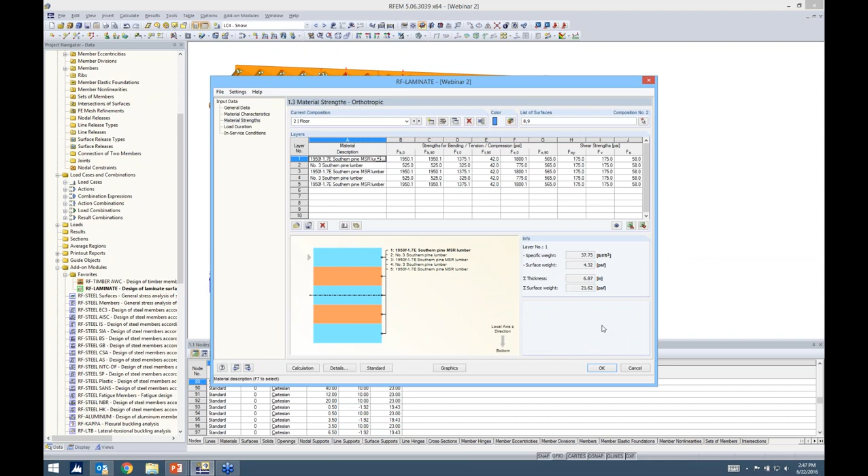Going back into RF laminate, we can continue moving down here. Actually, one more thing I forgot to do: along with the orientation of the axes, you'll notice here that we have our walls framing into each other, and this is a rigid connection now. For cross-laminated timber, we probably won't have a rigid connection, almost guaranteed. So how do we address that? The answer is with line hinges in the program.

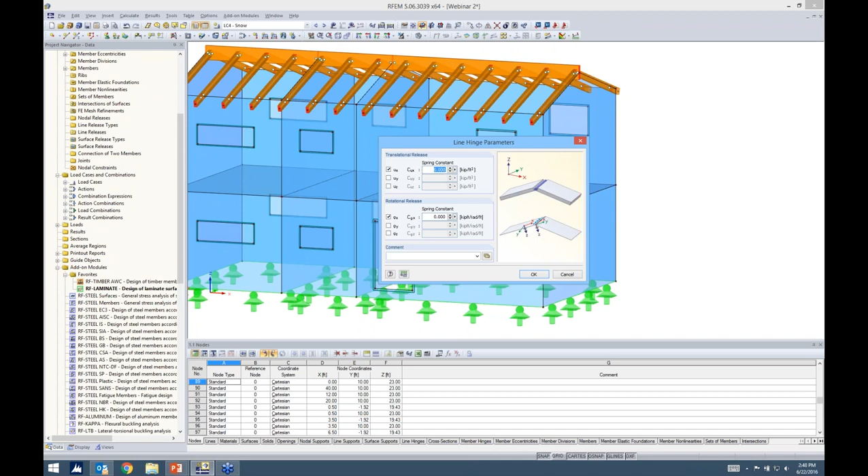Every surface is composed of line elements on the outside. If I go to Insert, Model Data, and Line Hinges, I can assign a line hinge graphically. I need to give a new definition for a line hinge. With the screws and cross-laminated timber panels coming together, I'm probably not going to have any resistance for rotation about that joint, the local x-axis, so I'll leave this as released. As far as translation along the joint, we'll probably have a little bit of slippage there, so I can define a spring stiffness coefficient of 40 kips per foot squared. I click OK.

I'm going to use this option that says select surfaces and automatically assign the lines—I think it's quickest. I click OK, and then I can select all of my walls, and you'll notice they're all listed here. I click OK, and now I have all of my line hinges assigned. I can see these line hinges, double click them, and edit them individually. It's a nice feature to use that tool. However, there's one thing that we do need to clean up.

Just like the example where you have two members framing into each other and you cannot define the member ends both as pinned, you'll get an instability. You need to have at least one rigid member, and the other member framing right into it can be defined as pinned. But if you define them both, we get issues within the program.

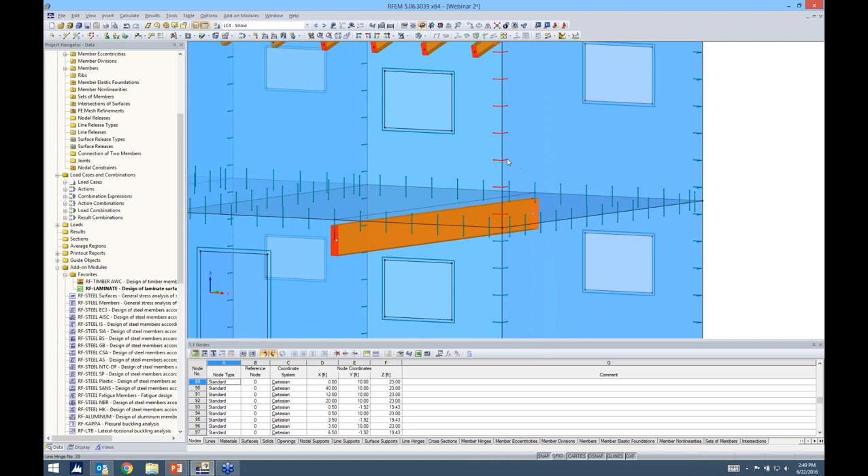Same for wall panels. We don't want to define two wall panels framing together both with a line hinge. We actually want to delete one of those. So I'm just going to hold down my control button, select them graphically, and click delete. Now let me go ahead and do so on the other side, again just by holding down my control button, and I click delete.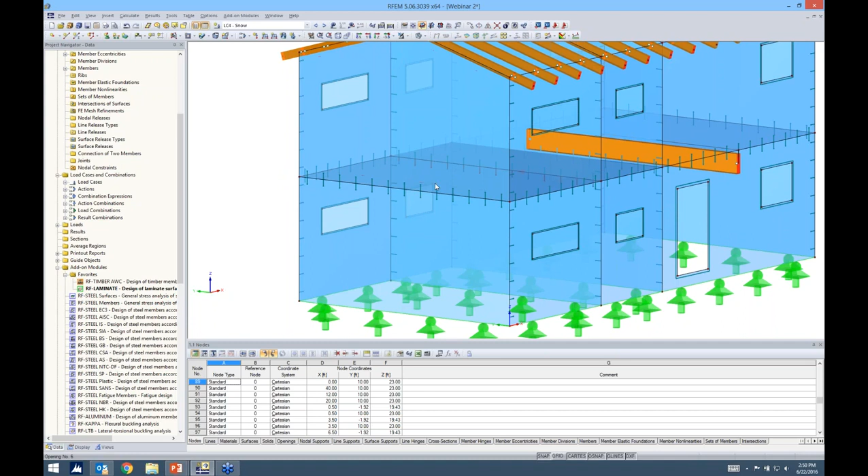Now you might ask yourself, well, I see two line hinges here, but the reason why is because my floor panel is also framing in here, which doesn't have a line hinge. Therefore, we're stable for this particular intersection.

The last thing I want to do is add one more line hinge to my floor. So if I create my visibility by selected objects, go to insert model data, line hinges graphically. This time I'm going to use the same definition, but select the surface first, then the line, and click OK. Then you'll notice here I have another line hinge, and I still have my one rigid surface framing in right here.

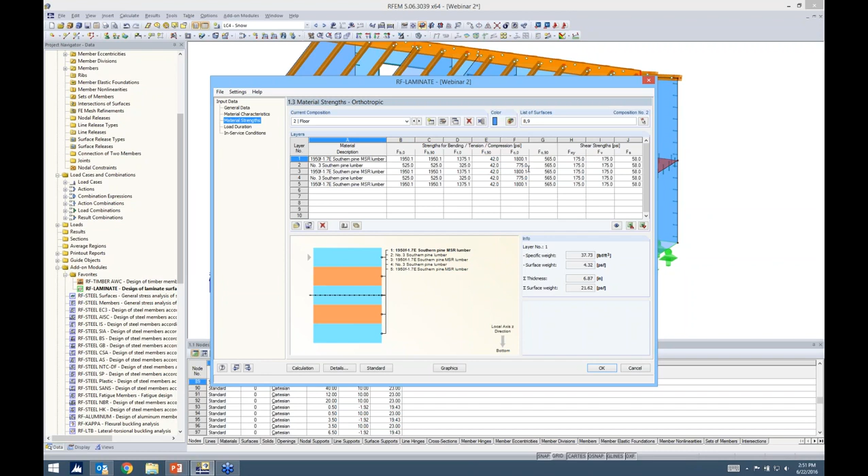Canceling this visibility mode, I'm going to jump back into RF-LAMINATE here and continue working down my list. Material strengths - this looks very similar to material characteristics. It's just giving you your strengths for bending, tension, and compression based on what the code is telling us.

Load duration - this is just from our loads that we've already entered into RFEM, so you can see everything's automatically linked here. Everything looks correct except for maybe wind; we want it more as 10 minutes for our load duration. Then the load combinations for ASD are automatically updated with the correct load factor.

In service conditions, is your panel dry or wet? All of ours will be dry. And then you can go ahead and click on the standard button here, and we get some other factors that are applicable to our strengths, our capacities.

What's nice too is that we have all the references to the code here, so you never have to guess - well, I don't remember where load duration comes from in the code. We give the reference right here, so you can flip open to the code and take a look at that.

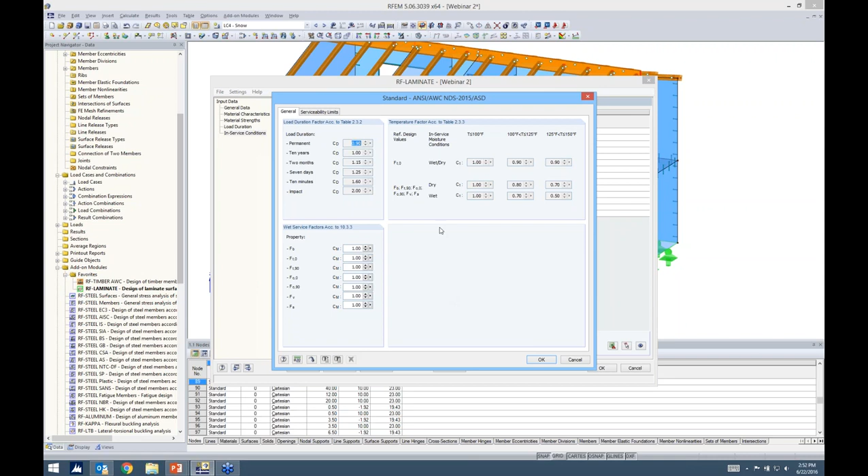So with that said, I would go ahead and run the calculation button now, but it takes just a minute, so instead I'm just going to jump to a model that's already been solved. Let me go ahead and pop open my RF-LAMINATE module. Like I said, this is the exact same model - I just have all my solution done right here.

So you can see here that now my results have popped up. My max stresses are given as a ratio by loading, so we can see load combination 14, load combination 15, and so forth. You'll also notice there is a stress check for every single bending, tension, compression - every check in the code that requires shear will all be listed here. So that's one awesome thing about RFEM, is that we don't just give you the controlling ratio, we give you every single one of them.

So that way you can really understand what all the different load checks are. As we scroll through these, you'll notice our diagram is changing for all of them. But let's say I'm really only interested in the max load check - I can filter it according to the max here, and it jumps to the load combinations that are controlling. If we go back to the full list, regardless, we get our max ratio listed right here - a nice green smiley face, so we're below 1.0.

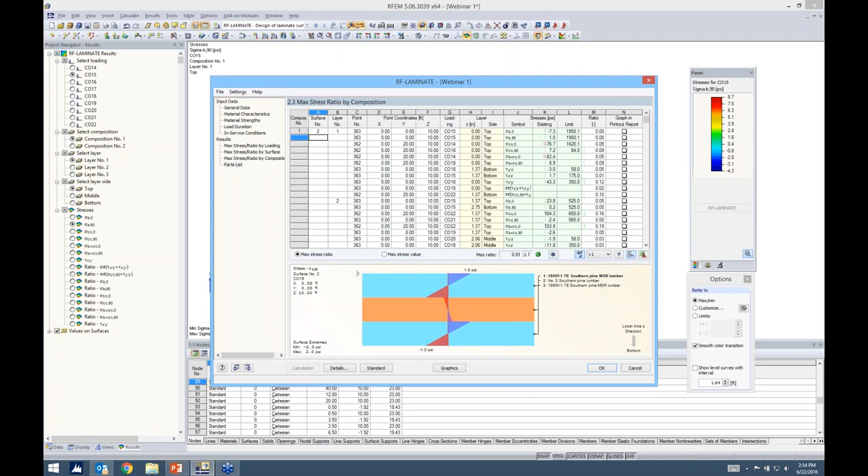These other options are basically just rearranging your results. This one is according to surface, so now surface number 2 is listed here. And then we have composition, so our walls and our floor that we created. We also have our material takeoff here - engineers might be interested in this.

For their calculations and such, go ahead and put this report in there. So that's available in this module.

Now the other thing we can do is jump to our graphics, and you'll notice our results bar is here now, and we can view all of the different stresses. Although we had it in table form, maybe we want to see it graphically, so we have all of our stresses here that we can view.

We have composition 1, which is our walls. We can jump to composition 2, which is our floors. So, very powerful in terms of the graphics as well.

And then we can even view our ratios as contour lines as well. You'll notice everything's blue because we're well below 1.0. If things were closer to failing, it would be closer to that red color.

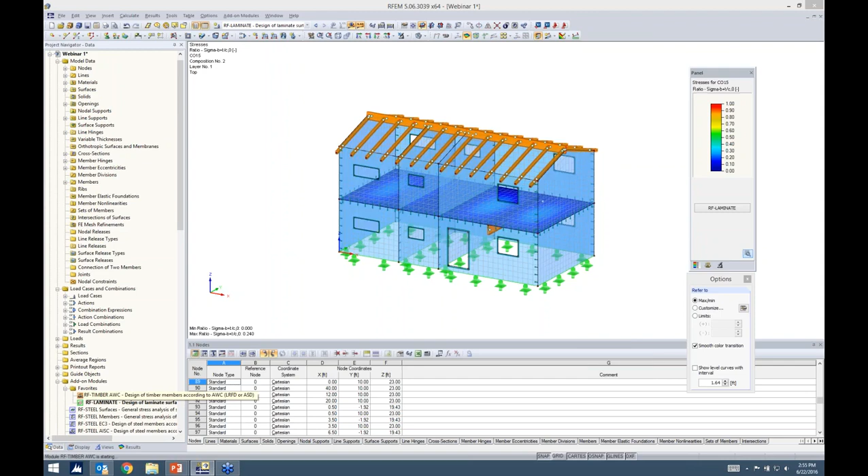Okay, with that said, I am now going to jump into the Timber AWC module. Lucky for us, the module looks almost identical to the CLT module. This is pretty much the case for all of our add-on modules, so when you're opening up dynamics, steel, or timber, all of them look very similar. There's no need to learn all the different modules—it's intuitive no matter which one you're in.

You can see here that we can choose design according to ASD or LRFD. I'll go ahead and choose ASD. I have my members checked as all now. We can also do member sets so that the design optimizes all the members to the same size, so quite a few options there.

This is similar to what's in our steel module or our concrete module. Now for the actual design load combinations, because I'm running ASD, I want to choose my ASD load combinations for my design. Serviceability is the same thing as in CLT.

If we wanted to take a look at some deflections—I guess it's not in there—if we want to look at some of our deflection limitations, we can go ahead and choose that for serviceability as well. Fire resistance—we also have the ability to do fire resistance design. Again, you would want to choose the applicable load combinations here, and we'd get a few more options for fire resistance.

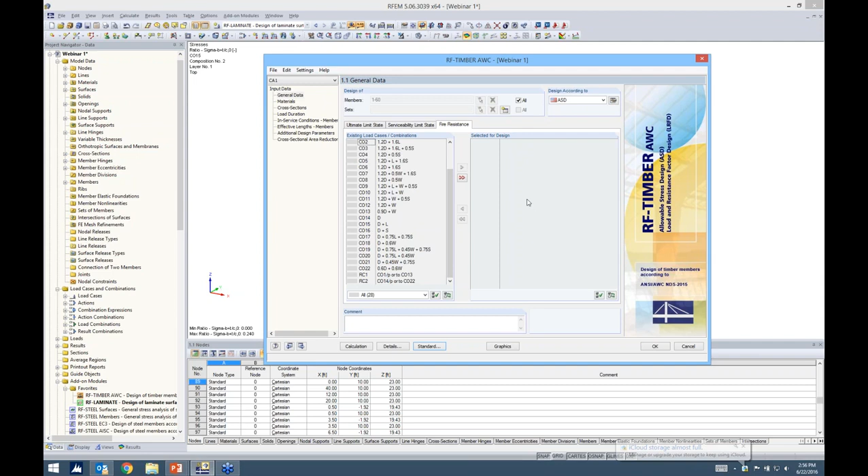Moving down the list to materials, you can see that concrete and steel are bright red. This makes sense—we can't design a concrete or steel beam in a timber add-on module, so those are not applicable. But you can see our timber materials are applicable.

Laminate is not applicable because we need to use the laminate module. Cross-section is the same thing—if we had steel or concrete in here, it would be red as well.

Now you can choose to optimize these members. Let's say we're well below 1, or maybe we're above 1—we can optimize. We get that question quite a bit, and that's certainly an option in these add-on modules. So you can optimize from the current row, which means it will choose one of the glulam Western species, or we can choose from our USA favorites list that I showed you before.

Load duration—this is the same as CLT. You can see here that our load cases were generated, and we already have the load duration factors correct in here. In service conditions, dry and wet, pretty self-explanatory here.

Effective lengths—this is if you want to consider buckling, or lateral torsional buckling, we need to come up with our L effective. The default is the full member length, but if there are some connections in the program that give a shorter unbraced length, we can go ahead and modify that here.

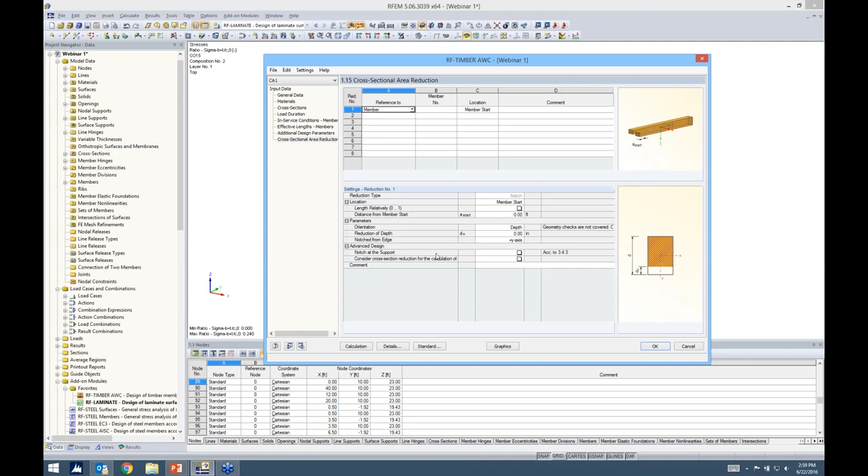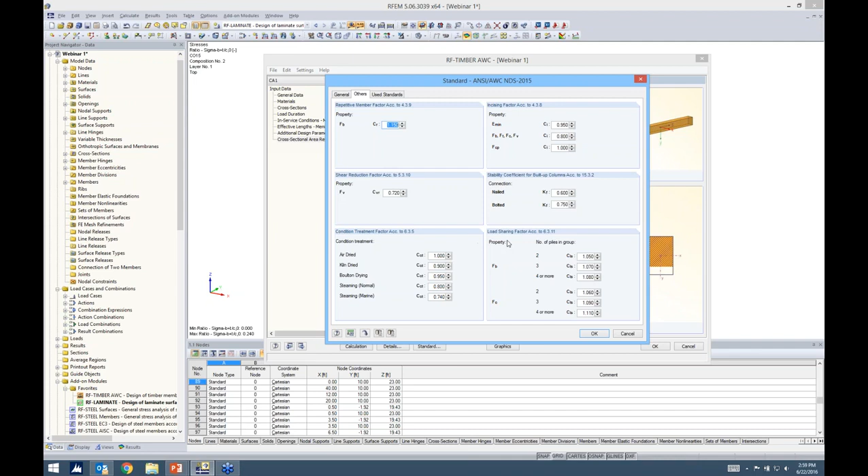If we click standard again, this just gives us a lot more factors according to the NDS. Again, we have all of the references here, and as far as our timber module, we're very strong in timber, so I think we offer a lot more factors in comparison to maybe some other competitors. Stability coefficients for built-up columns, shear reduction factors, load sharing, everything is pretty much available here.

All I need to do is go ahead and click the calculation button, and you'll notice that I get my green smiley face. Again, just like CLT, I can filter if I want. Also keep in mind that throughout the program we have direct links to Excel, so you don't need to worry about copying and pasting, but we can actually use this button to directly integrate with it. We get the design according to the cross section.

Maybe more interesting would be the design by the particular member. Again, the program is so powerful that we give every single check and not just the controlling ratio. And even better yet, we give every single variable that's used. We list our cross-sectional data that's being used, our internal forces that we're comparing it to. So we get very little tech support on, okay, I don't understand where these numbers came from, or maybe I don't understand why this code check is controlling over this one. Everything is listed here, so it's nice.

It's very thorough. And then, of course, the takeoff ratio, parts list by members located at the end as well. We can view everything graphically.

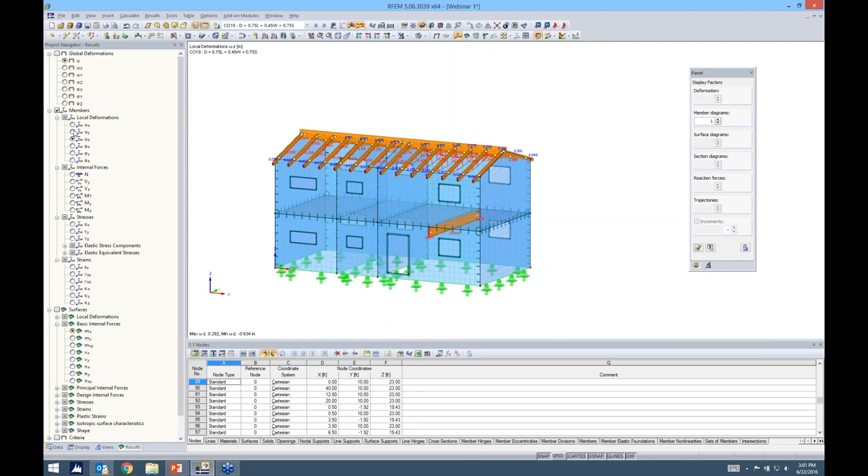You'll notice for the NDS, we don't really have anything too much to show here other than the design ratio. But you can always switch back to one of these load cases in RFEM to show your results for, let's say, these different members here. We can show internal forces, which if I change this to wireframe, you'll be able to see it a little bit better. So quite a few options in terms of running a timber analysis.

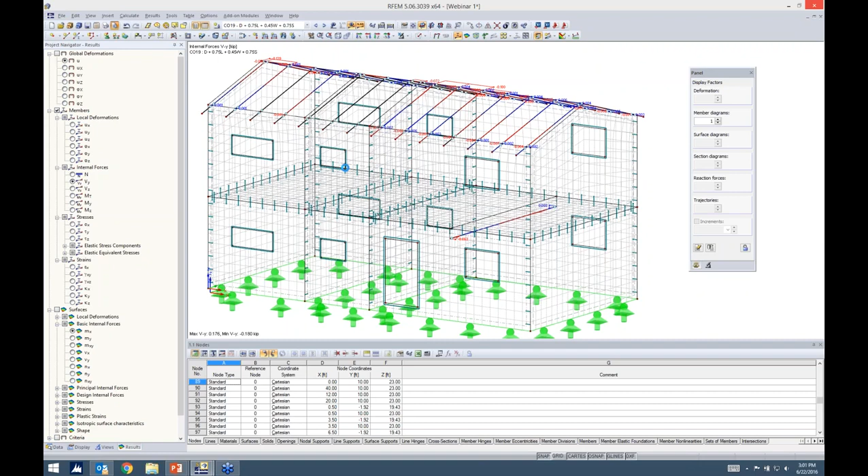Okay, one quick thing before we conclude the webinar. I just want to show you guys the printout report. Again, I think it's something that is quite powerful, especially in comparison to a lot of other printout reports that you have probably dealt with from other software competitors.

So you'll notice that a completely separate application pops up, and here's our table of contents right here. Let's say we want maybe cross sections before line supports, we can just drag and drop, and the program will automatically update that. But not only RFEM, we also have our add-on modules listed down here, like RF-LAMINATE, everything was brought in from those add-on modules as well, including some layer diagrams.

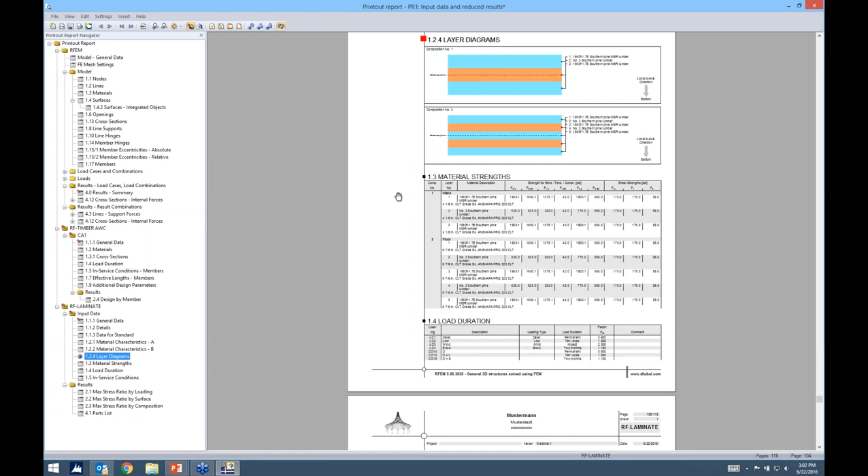You can always add pictures in here. If something were to change in your model, you don't have to worry about reprinting pictures, everything will be updated automatically. So everything's very synchronized within the program.